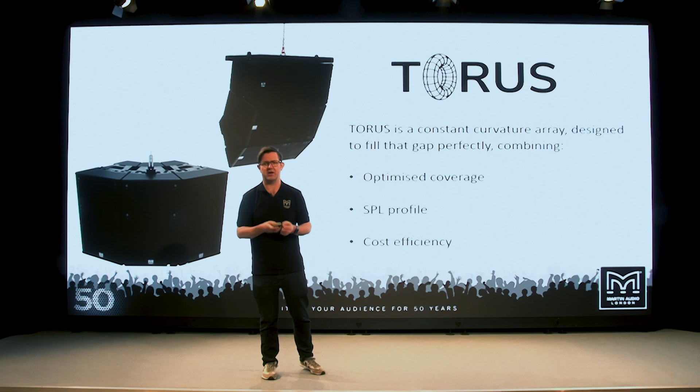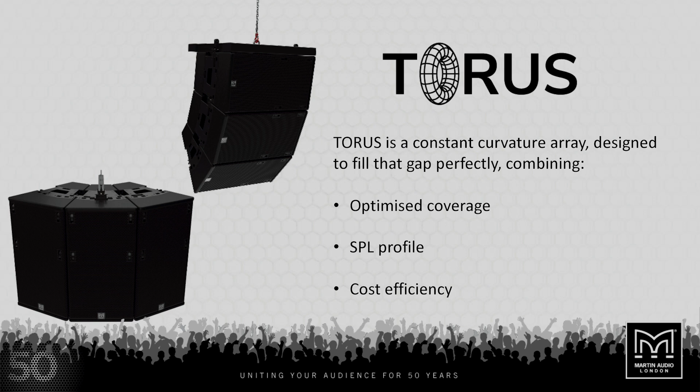And this is where TORUS fits in. TORUS is a constant curvature array designed to fill that gap perfectly, combining the kind of thing you'd expect from Martin Audio now, our optimized coverage through our display technology, our SPL profiling, and in a cost-efficient package that makes sense for those kind of throws.

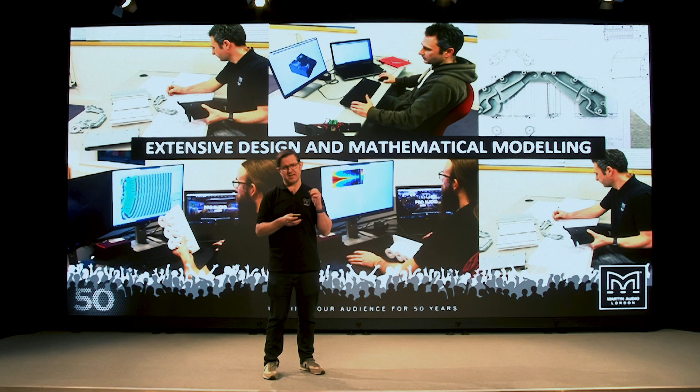TORUS is 3 years in the making. We've put a lot of time into extensively mathematically modelling the acoustics through our BEM modelling and extensive mechanical design work with constant prototype and refinement throughout the process, pushing acoustic boundaries with the intention of delivering something that we believe nobody else has, the definitive constant curvature array.

TORUS overcomes typical constant curvature issues. Typically, a lot of manufacturers these days do make arrays with adjustable dispersion, but what tends to happen is people have a waveguide that's designed to have a fixed dispersion of something like 90 degrees, and then they just hinge the waveguide in. Now the problem with this is it's not just the horn walls that dictate the dispersion of a waveguide, it's the entire geometry of the waveguide, its flare rate from the throat out to the mouth. And we wanted to go to new levels to improve that.

Many constant curvature arrays lack sensitivity in the midband, so you'll see typically a direct radiating 12-inch or 15-inch driver that might have quite good LF response but will drop off as it goes up in frequency, requiring a lower crossover point into the HF device. They also suffer from comb filtering, so whilst waveguides are often designed so HF coverage is smooth as you transition between enclosures, once you're into the mid-range band, depending on the size of the array, they're just going to beam and side lobe like any sources would.

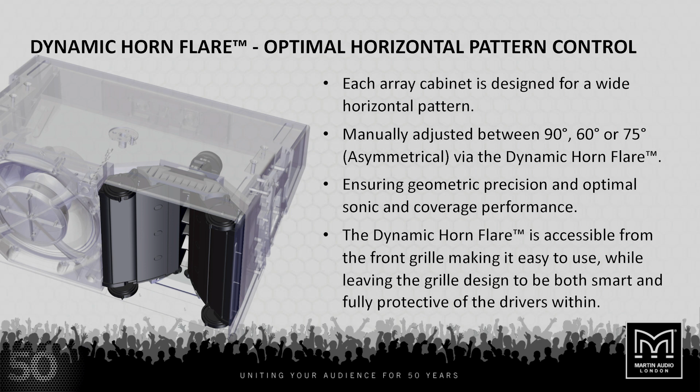TORUS fundamentally addresses all of these problems with the dynamic horn flare, optimal horizontal pattern control. Each array element is designed to have adjustable horizontal pattern control within the dynamic horn flare. You can manually adjust from a 90-degree horizontal pattern to a 60-degree horizontal pattern, but you can also adjust asymmetrically to have 75 degrees in either aspect ratio.

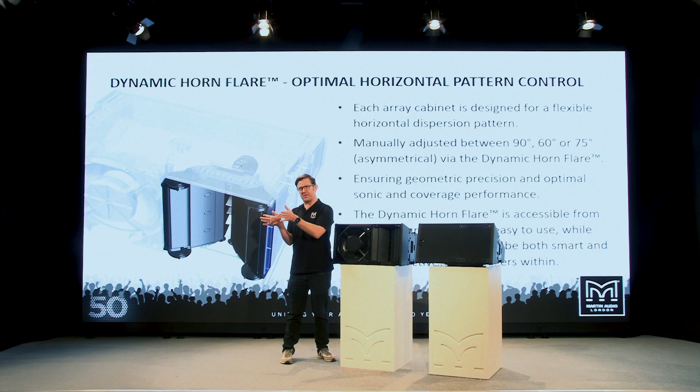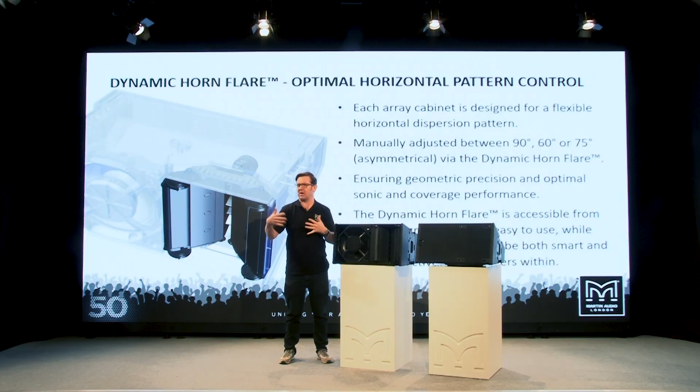The way that you do that is you rotate these two small tabs here at the top and bottom of the waveguide, and as I do that, you'll notice the geometry of the waveguide change from the 90-degree setting to the 60-degree setting. A key element of that is that we've not just moved a sidewall, we've changed the flare rate and the whole geometry of the waveguide when we've made that adjustment.

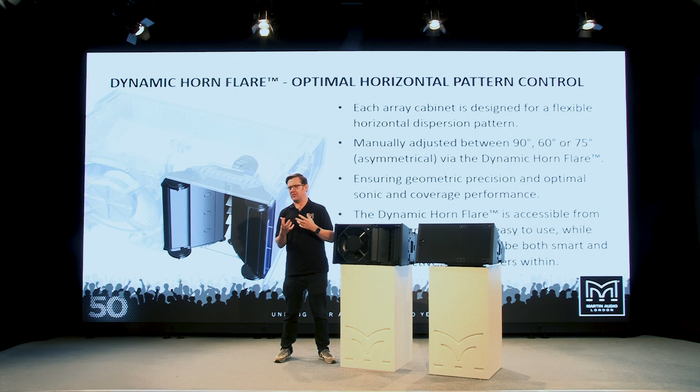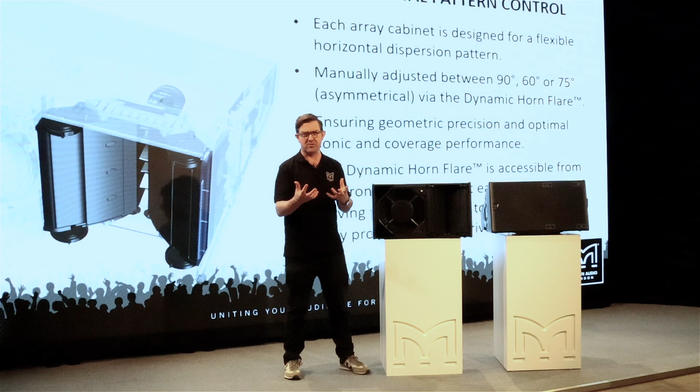Those two adjustments on either side of the waveguide are accessible through the front of the grille. So we've been able to make something that you can easily adjust the horizontal pattern control of, but at the same time keep a grille all the way across the front of the product, meaning that it has an elegant and discreet look when installed or deployed on a concert.

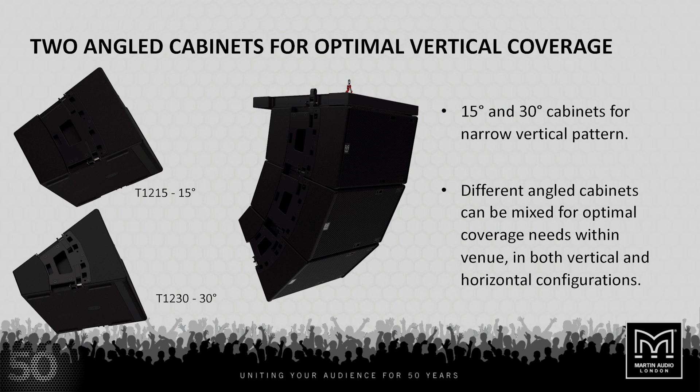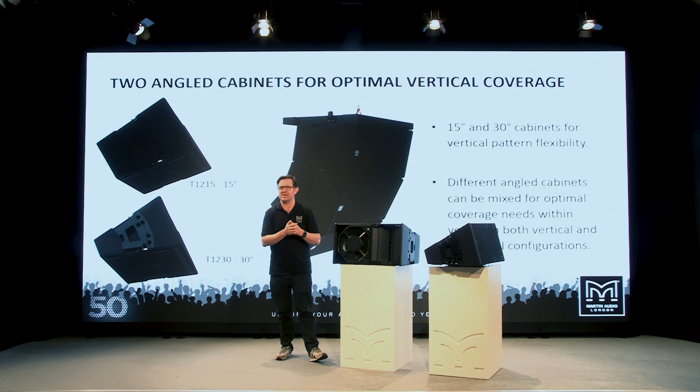So we have two angle cabinets for optimal vertical coverage. You can see here the 15-degree wall cabinet, the T1215, and over here the 30-degree wall cabinet, the T1230. The 15-degree cabinet's got a little bit more output, as you would expect, so is for the longer throw applications, and the 30-degree cabinet has a wider dispersion and a little bit less output. Those two cabinets can be mixed together within the hang and optimized to ensure the right level and coverage pattern that you desire for your application.

So, signature sound. It's important to us at Martin Audio that any of our products has our signature sound. We do things a little differently, and that heritage goes all the way back to the Philishave systems that Dave Martin produced many moons ago now.

So we start with the 12-inch driver. Firstly, you can see straight away it's got a phase plug in front of it. What that does is lift the sensitivity at the top end of the driver's performance, giving the overall enclosure a rising frequency response. That allows us to get the maximum amount of output in the vocal range, but it also allows us to have a slightly higher crossover into the HF drivers. Because we have a rising response, in an array we're then relying on the low-end performance from this unit to couple with its neighbours to bring that response back up to flat.

In terms of the HF drivers themselves, we have three 1.4-inch dome compression drivers with a small exit. The reason we do that is that they are light and fast and can regenerate lots of high frequency. You would typically see in another product like this a big old 4-inch diaphragm compression driver maybe running at 800 hertz or a kilohertz. The problem with that is the diaphragm's heavy and slow, and when it tries to create HF, it starts to wobble and manipulate, and you start to get lots and lots of distortion.

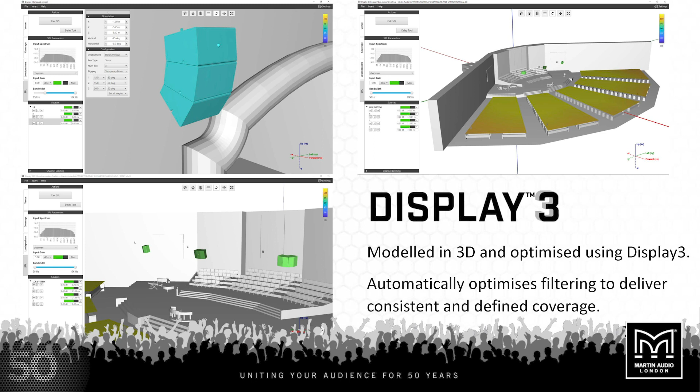And this is all optimized via our fantastic new piece of software, Display 3. Display 3 not only optimizes sound systems, but it also optimizes the performance between the drivers within one hang. That's how we use our FIR know-how to make sure that we get rid of some of those comb filtering effects that you'd be used to in a constant curvature array.

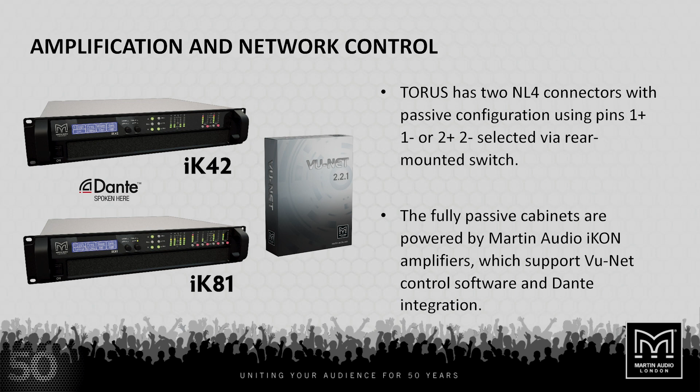In terms of amplification, TORUS fits seamlessly into the Martin Audio ecosystem, and as such is powered via iKON amplifiers and controlled via our Vu-Net software. There's an elegant switch on the back of the product that dictates which set of pins on the Neutrik connector feed the passive crossover and the subsequent transducers.

We do that so we're able to run a 4-core cable up to a single cluster, link out to a couple of boxes below, and then have independent amplifier channels and DSP processing feeding different boxes within the hang off a single cable, giving a neat, elegant plug-and-play solution with sophisticated processing ensuring optimum coverage.

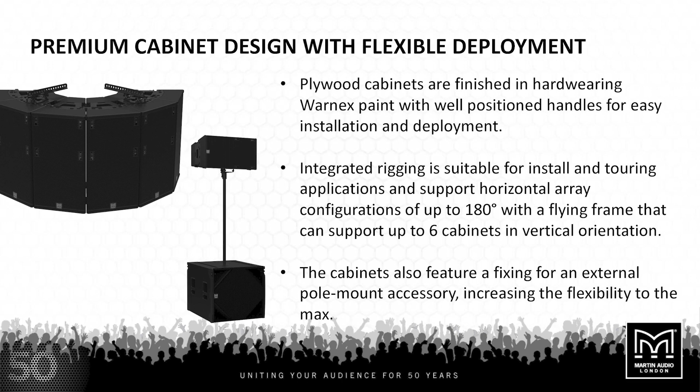As you'd expect from us, it's a premium cabinet design with lots of flexible options for deployment. It's painted in our standard Warnex paint and made out of birch plywood, with easy positioned handles and lots of options for hanging in horizontal clusters with mixes of 15 and 30 degree cabinets, up to 180 degrees of dispersion, or the other way up vertically in a 6 deep hang, rather like a line array.

Rather than go through all of the accessories individually, here's a quick rigging video to take a look at how you would deploy TORUS in the real world.

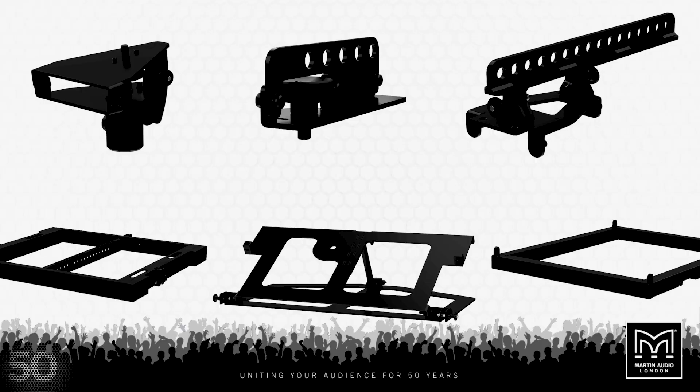There are 3 accessories. The main fly frame itself, which can have our inclinometers attached to it and be deployed with TORUS for vertical drops.

In the middle there, you can see a little ground stack accessory that clips into the subwoofer and then the top box, and allows you to have different angles.

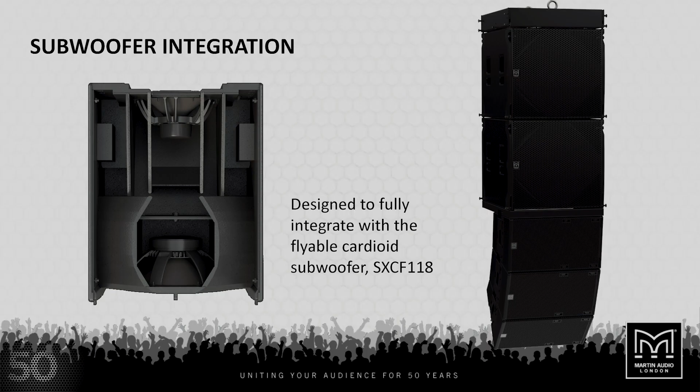And then finally a transition frame, which connects between the subwoofer offering, which, as I've already hinted, is the SXCF 118. In the front of the enclosure is a 4-inch voice coil 18-inch driver, and in the back of the enclosure is a 14-inch neodymium driver.

Those are independently processed via our iKON amplifier with 2 independent channels of DSP to ensure a maximum of about 30 dB of rejection happens with the cardioid pattern. As you can see there, it flies seamlessly above TORUS with an elegant transition frame for hanging the top boxes underneath.

So in summary, it's a 12-inch LF driver with 3 1.4-inch diaphragm HF drivers above it, passive crossover network in between them. There's the manually adjustable dynamic horn flare between 60, 90, or asymmetrically at 75 degrees.

There's 2 cabinet angles, so either the T1215 or the T1230 for 15 and 30 degree sidewalls. There's a phase plug for optimum midband sensitivity and therefore the most amount of vocal clarity as possible.

All of that coverage is optimized via our new Display 3 software and powered by our iKON amplifiers. It's a plug-and-play system, it's quick to set up, it's easy to rig, and it has everything you'd expect from a modern sound system, from Dante connectivity to 3D prediction software.

Optimized for short to medium throw live sound and installation applications, with a whole wealth of different deployment options, from fills to distributed systems to vertical hangs to DJ monitors to center clusters. A truly versatile product, whether you're a touring company or an installer.

So Display 3, the most important software release in the company's history. Software for the modern era, so all new prediction software from us and optimization software at the same time. It's flexible, powerful, and very professionally presented.

It also works seamlessly with SketchUp, allowing users to pull very complex models in from SketchUp and map heat coverage patterns of the audio onto existing layers, as well as creating layers natively in the file and exporting them back out to SketchUp. It's a very, very powerful tool.

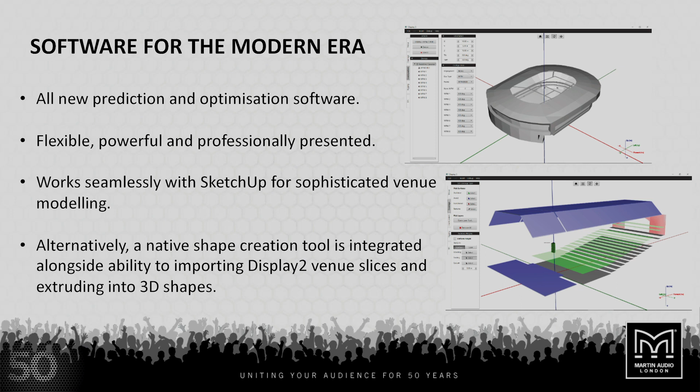In addition to that, you can of course have a native shape creation tool. And one of the nice touches is we allow users to open Display 2 venues and clusters and bring those into a Display 3 environment.

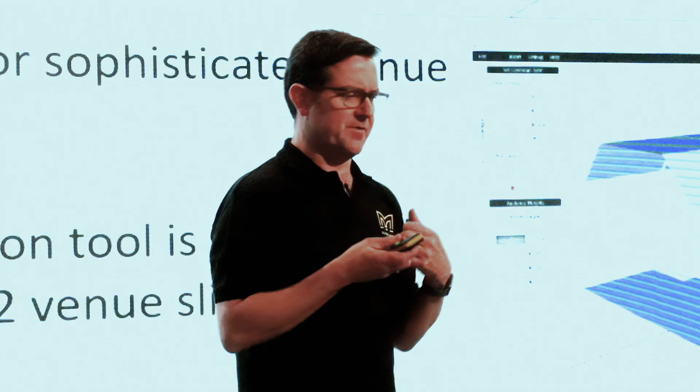So for those looking to add some value to existing deployments as we start to get back to normality, you can have another look at original D2 mappings by bringing them into the software and plotting those into a 3D environment, really adding value to your customers and designs.

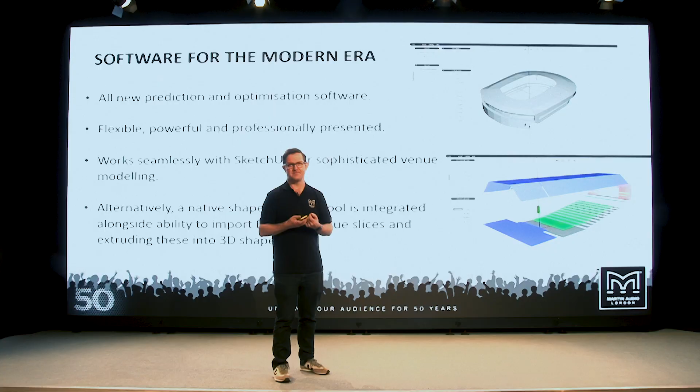Over time, Display 3 will incorporate all of Martin Audio's line array products and point source products, ceiling speakers, subs. Everything that Martin Audio make will exist in a Display 3 environment.

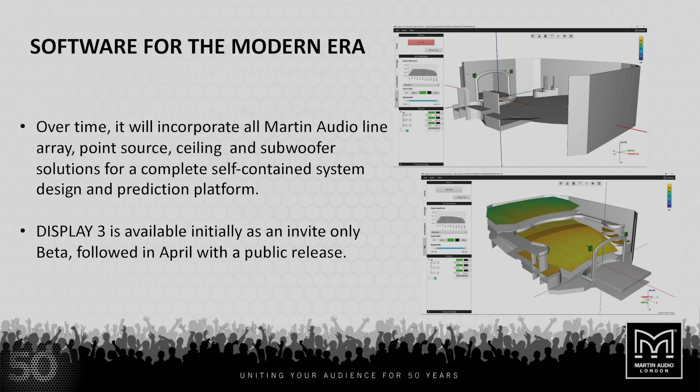To begin with, Display 3 is a beta, invite only, but I'm delighted to say that by April, or during April, we'll have a full public release.

Equally, TORUS will be available in your market from April. We're manufacturing in volume in March, and it'll take us a little bit of time to get that out into your distributors and channel partners' hands.

So, TORUS and Display 3, together the most significant launches in the company's last 10 years, and from a software perspective, our biggest launch ever.